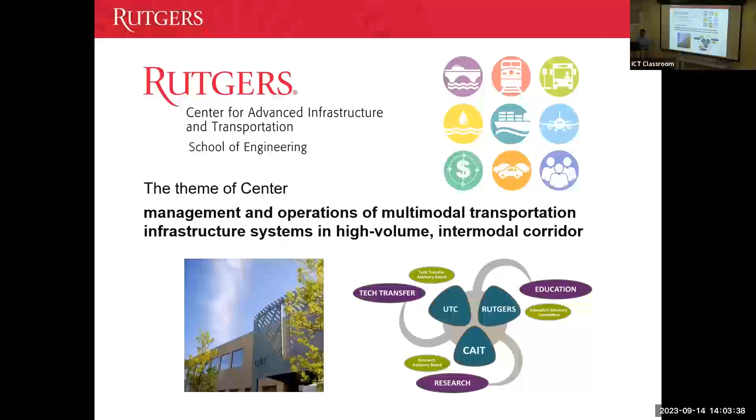At CAIT, we do all kinds of activities, and my research mainly focuses on the infrastructure side, mainly on highway, but sometimes also bridge, rail, and pipeline. So today we'll give you an overview of the projects, findings, and experiences we've had over the past 12 years, combining 4 or 5 PhD works, all heading toward the same direction: sustainable and resilient roadways. Not only pavements, we're also touching on base materials and even right-of-way assets for solar energy harvesting, for example. Hopefully we can learn from each other and find future collaboration with ICT.

Quick outline: an overview about sustainability and resilience. Probably everyone knows about that, but I want to give you a refresher. Some projects or findings we're using looking at sustainability for climate change mitigation and adaptation. Also some recent work we're starting, looking at how to improve roadway resilience to flooding. And some energy harvesting work we've been doing for the past 5 or 6 years from roadways and bridges, actually second generation on that, plus a summary and implementation.

Sustainability, we all know that, right? We're talking about three pillars. Here we want to focus a bit more on greenhouse gas emissions because these have increased rapidly with human activities for economic development. We know this is like a blanket impact from greenhouse gas emissions, causing positive radiative forcing, meaning you're emitting more heat from the ground to the atmosphere. This increases air temperature, causing a lot of adverse effects: energy consumption for buildings, extreme events, melting glaciers, and many other things.

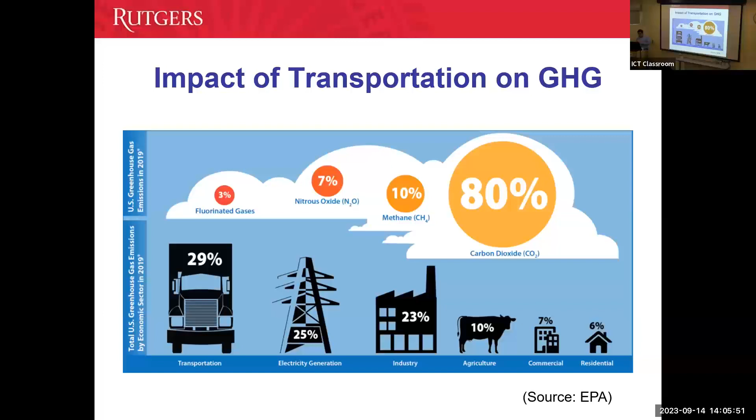You may wonder where these greenhouse gas emissions are coming from. Here's data from the EPA on greenhouse gas emissions in the US. We can see across different sectors, 29% comes from transportation, especially roadway transportation, because we're talking about fossil fuel usage compared to other sectors. Among those emissions, 80% are carbon dioxide. So in order to mitigate climate change and reduce greenhouse gas emissions, there are many things transportation can do.

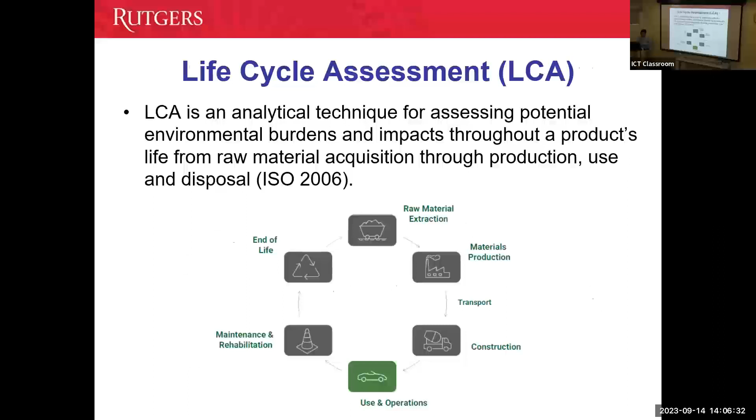You may wonder why should we do that? What's the purpose of using LCA? How can that help mitigate greenhouse gas emission? First, you want to quantify it - you know how much greenhouse gas emission comes from your project. Then you can find a way to reduce it. Using this approach, you find out not only the total emission, but also what's the emission at each phase: material, construction, maintenance, operation.

Then you can see, can I change something? Can I use concrete instead of asphalt? Can I use recycled material or not? Or can I just change the geometry alignment of the roadway? In the US, it's impossible because we only have very few new roads. But in developing countries, we have the chance to select different geometry alignment to reduce the excavation. Then you're reducing the hauling of material, reducing greenhouse gas emission. So that's a huge excavation amount.

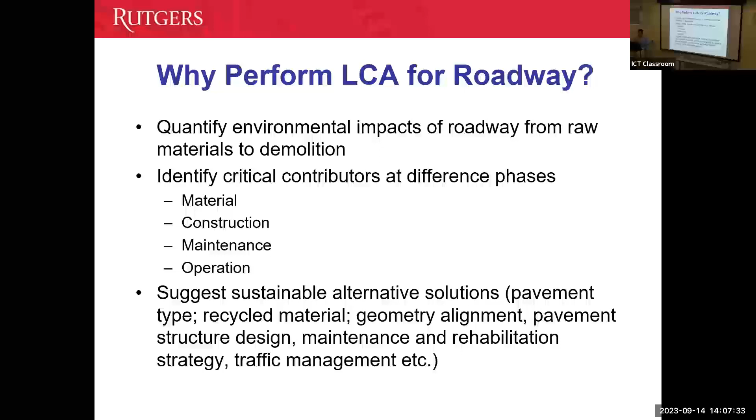And then also looking at the structure design, also maintenance strategies - we'll show you examples. We are using this approach to really try to improve the sustainability, reduce the emission.

First, from the material side, I found this chart from one of the early papers by Barcelo. I think it's very interesting because it gives you a rough overview of what are the embodied energy or carbon in megajoule per kilogram or kilogram carbon dioxide per kilogram of material. Basically, you can know roughly what kind of embodied carbon energy each material has. Here, concrete block is more like cement plus stone - cement is on top. Asphalt here is more like asphalt mixture, and you have bitumen on top. These are the materials we're more familiar with.

But also look at this - other materials like glass, plastic, or even steel, they are very environmental burden intensive, I would say. So if we're talking about reinforced concrete, or polymer modified binder, we should not neglect them, because even a small amount of them can bring a lot of greenhouse gas emission impact.

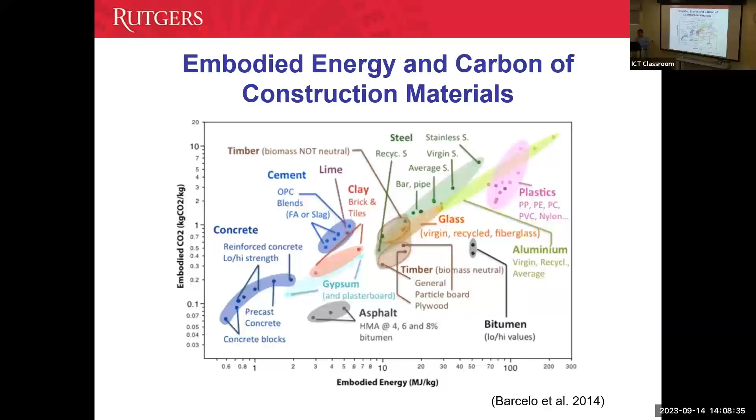In order to really mitigate that, industry has already moved ahead. You've probably heard about EPD. Now Federal Highway has a Climate Challenge program - they're trying to encourage the DOTs to use EPD in the procurement process. They hope the industry will be able to submit either industry average or product specific EPD. The EPD is basically like the output of the LCA, but it focuses more on the material stage, we call it A1 to A3. So in order to produce 1 ton of concrete or cement or fly ash, what are the embodied carbon or other environmental impacts for that?

In that case, you have this label, like a nutrition label for your food - you'll be able to really make it transparent. In the procurement process, you'll be able to set a bar, say we want the EPD lower than this amount, or give a little bit of incentive to the EPD which has lower value. That's something Europe has been implementing and the US is trying to catch up. So in this case, we try to control the material side.

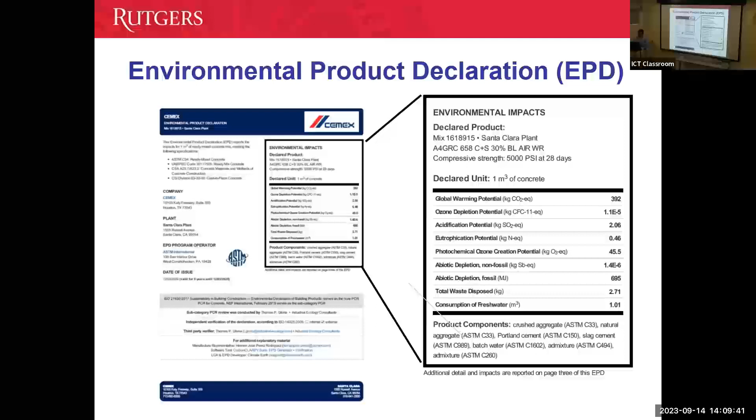Another one is the type of pavement. We are more focused on asphalt pavement, but don't forget, we also have choice for concrete. This is an interesting project we worked on with the Port Authority - they're looking at rehabilitation of the runway, and looking at what are the choices we have, and what's the life cycle cost versus life cycle assessment results if using asphalt overlay versus concrete overlay.

So the bottom one is something like at that time they're making the decision. They gave us the PMS data, gave us the previous rehabilitation strategy, and in that case we came out with a similar rehabilitation procedure - basically milling 3-inch asphalt tracks, 9-inch asphalt overlay.

If you do it this way, every 8 years you'll probably do milling overlay again. If you do concrete, you do a little bit of small milling, but putting down 18-inch concrete, and then you have very light repair. So we did an LCA for these 2 overlay strategies, and then we look at initial construction plus maintenance.

We found out that in total, the concrete overlay actually gives you less emission. This is for the overlay case.

We did a little bit more exercise for new airfield pavement. Using the FAA design software, you're able to design two pavement structures for the same traffic. We have 9-inch HMA, 12-inch HMA base plus another crushed stone subbase, versus 20-inch PCC. So for the new pavement case, that's the top result.

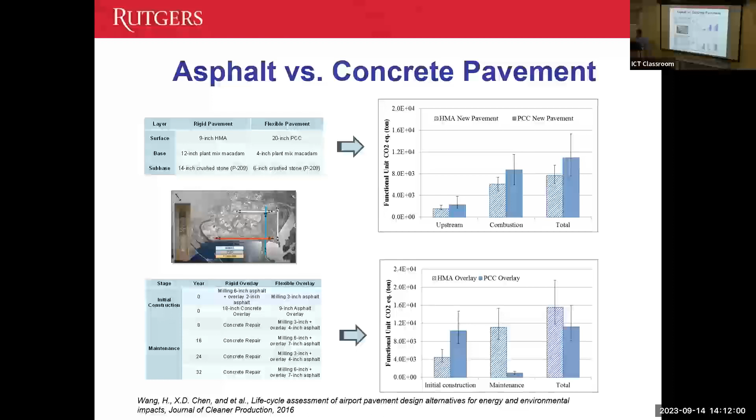But this is still the material stage. Now look at the use stage, which I know ICT has many people working on. In this case, we're looking at fuel consumption in the use stage, for example trucks, and we have aerodynamic drag force, mechanical loss, and rolling resistance.

So if you do have a 3% rolling resistance reduction, say 1% reduce, in that case we'll be able to have corresponding greenhouse gas emission reduction. So how can we really use this concept to help us reduce emissions from the pavement preservation or rehabilitation side?

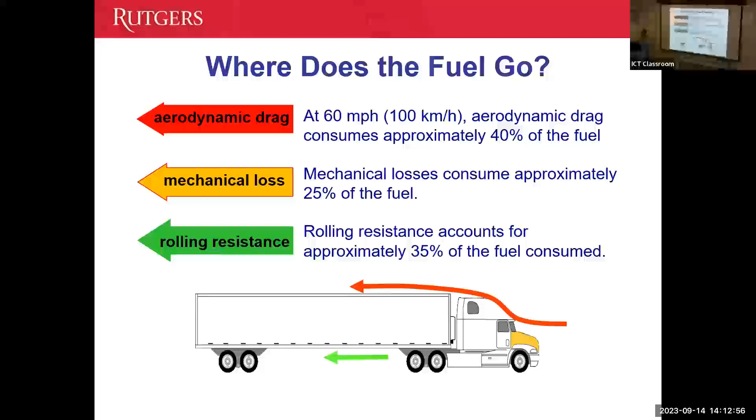So first we have to quantify. First we want to quantify what's the emission coming from the use stage.

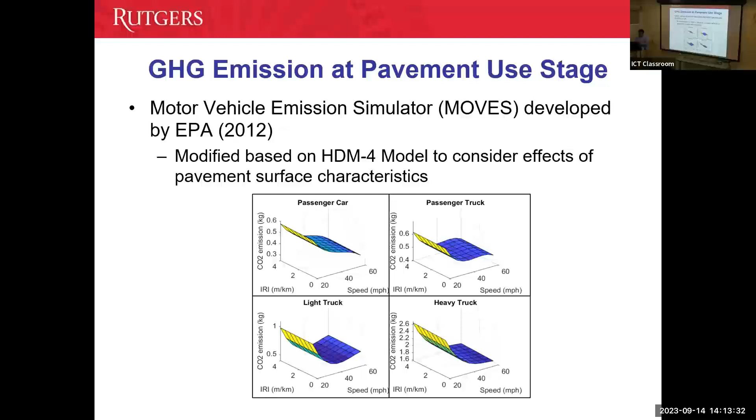After that, the first exercise we looked at was preservation. The reason we do that is because we think preservation is good with the very least amount of cost and material input, mainly for functional restoration - improving friction, reducing roughness, or reducing aging.

If you look at LTPP data, it shows IRI increasing, then after preservation it drops - a jump - and then goes back to increasing again. The data shows, depending on when you apply the preservation, you'll get different jumps and also different models after treatment.

So we use the data from 3 different treatment procedures, and we come up with a model that basically follows this trend. It's not a perfect model, but it generally captures the trend.

And then we put it this way: if I have the opportunity to select the timing for preservation, what will be the best timing? So what we did here, for different treatments at the project level, is ask - if I have the opportunity to do preservation at different application timing or year, what would be the carbon dioxide reduction compared to doing nothing?

You're expecting crack seal reduction to be very small, although the field data does show a little improvement for roughness. But with chip seal and thin overlay, you have more reduction. By playing with the amount and timing of doing the preservation, you'll get different reductions. In general, for a light treatment like chip seal or crack seal, if the initial roughness is getting higher, you probably will do it early. If your initial roughness is lower, you can do it later. This is because, as I mentioned, the jump after doing the preservation - the IRI jump - always depends on the previous IRI before the treatment.

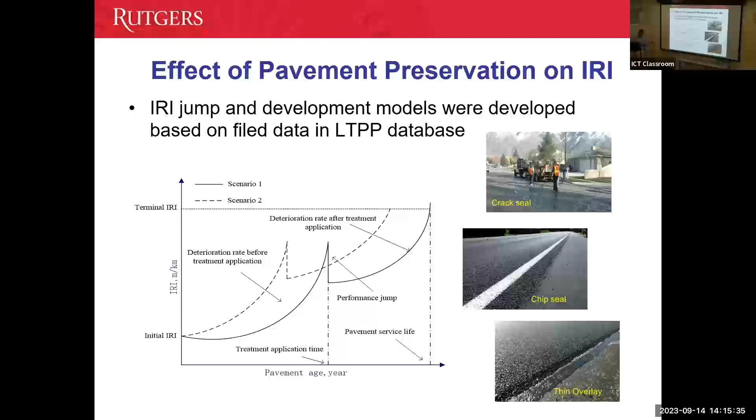People actually looked at this from a cost point of view before, but I think people didn't look at it from the CO2 point of view. So at that time, we were trying to find out, for a project level, what's the optimum timing. At the network level, we actually got a follow-up paper on that, which you can check for details.

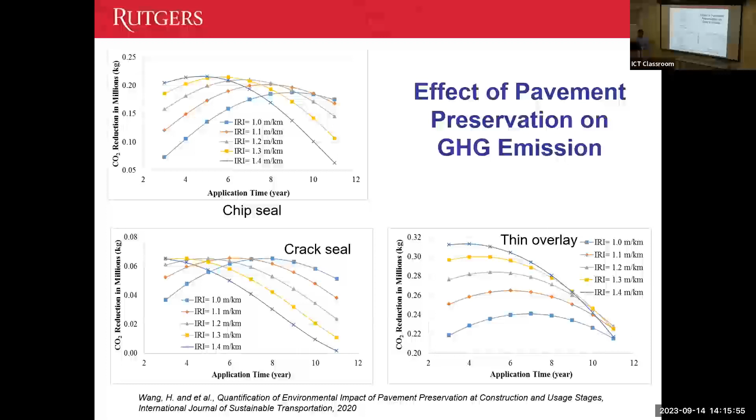So that's the preservation part. Then we talk about how climate change will deteriorate the pavement and accelerate its life. You may have different stressors, basically the potential threats caused by climate change. This could be slowly happening, like warming temperature or sea level rise, or extreme events like heavy rain or flooding. So we tried to find out, can we incorporate this into our analysis?

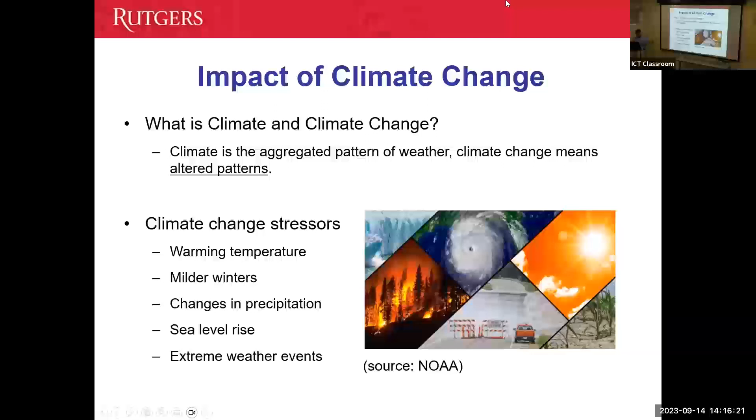One exercise we did is use ME, because at the same time we are doing the local calibration for New Jersey DOT. New Jersey has started using ME, but they are still using both design software. In a few more years, they will decide on using ME. So we developed the calibration coefficients for New Jersey, and then we tried to find out, if I'm using the temperature data coming from the climate model as compared to the current approach using historical ME temperature...

If you look at ME, regardless of which year you design, they're always using the temperature database from 1985 to, let's say, 2000 - repeating these 20 years of climate data, but not really using a future one, because at that time the future one may have uncertainty. So now we're trying to say, if we do have the predicted temperature, which comes from our collaborator from Columbia who is doing a local climate model, we're trying to compare what will be the difference, and how we can mitigate this impact.

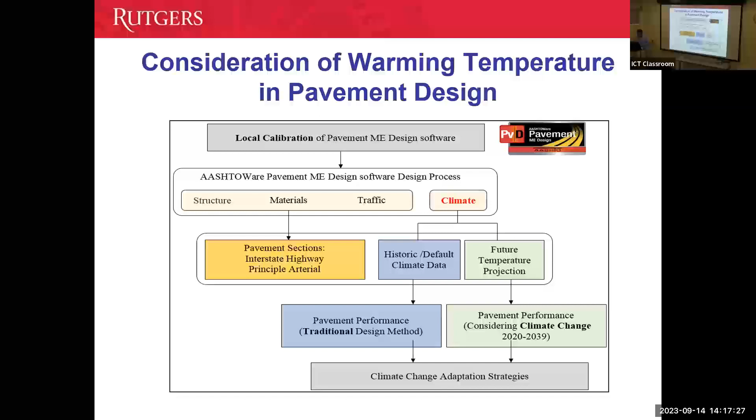So what we did here is also look at the emission. One way we differ from other people is we look at the emission. If you really look at climate people, they will tell you this greenhouse gas emission is not steady - it will decay with time, meaning this number will reduce following a function. So we adopted the Bern carbon cycle model, which gives you a decay function.

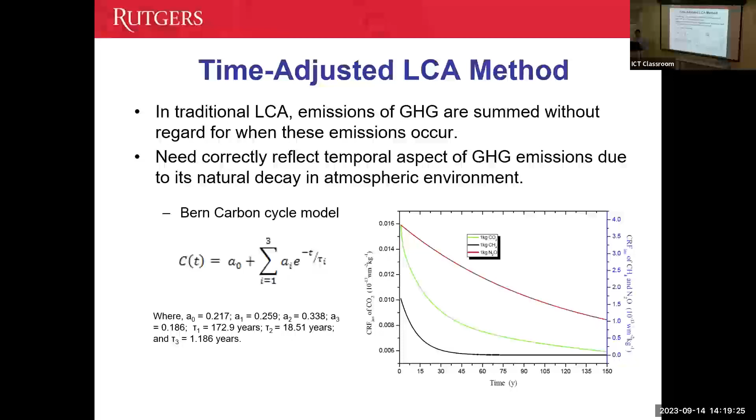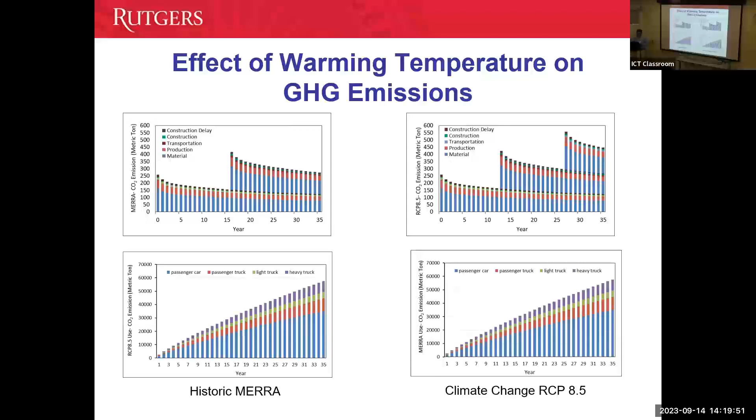So in this case, the left case is using the historical merra data, the right case is using RCP 8.5. You can see this warming temperature causes more rehabilitation, that's why you're seeing 2 jumps. But actually the total numbers are not a big difference, because the user stage also has some difference.

So in order to better show that, we did the difference - this case you have the difference between RCP 8.5 minus merra. That can be considered as the emission increase or reduction because of climate change. So this gives you a scenario: for this life cycle with this treatment, if I consider climate change, will this emission be increasing or decreasing?

And then because we do the yearly trend, you just look at the final number, that'll be the number at the end of the service period. And then you can see if we do changing different overlay thickness and also changing the threshold to apply the overlay, you will be able to see different patterns.

So interestingly, you are seeing at the overlay 6-inch, and if you do this overlay at the 10% fatigue cracking, you will be able to have actually a final negative greenhouse gas emission. Basically means at RCP 8.5, we're even having less greenhouse gas emission.

So this gives you a hint. If I do play my overlay strategy and threshold kind of in a nice way, I may have the way to reduce the impact of the emission from climate change factor. Because in this case, although I'm doing early overlay and also a little thick overlay, but I'm reducing the roughness in the user stage.

So in that case, that's why I'm still getting the final emission reduction. But again, this result is case by case dependent because the structure may change in the trend, also your overlay strategy change the trend. But at least that means we have the ways to play with it. I mean, you can find more details from the paper if you are interested.

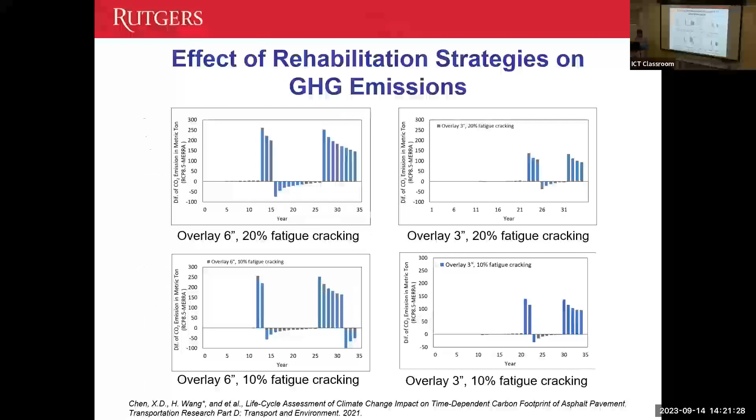And then after we look at that, we also realize, regardless we do how much to reduce the emission, it's still happening, right? We are seeing warming temperature, at least in a different way, although regionally it's different, but still we're seeing this trend. So we are seeing some extreme events happening, especially in New Jersey. We have a couple of flooding events. So we try to say, okay, how can we at the same time build infrastructure more resilient?

And then you look at the definition for federal highway administration, I mean, they are similar. Basically, first you try to do more work before it, anticipate, prepare, adapt, doing something, try to enhance your structure, or doing something within or after the disaster, right? Try to have the infrastructure respond to it or quick recovery.

And then you are expecting we have some hydraulic scouring to the asphalt. Actually, these first two pictures are taken from New Jersey. The first one was taken actually from the road on the slope nearby my house because that hydraulic pressure was able to pull the asphalt pavement out. The second one was taken from one of the coastal cities because they have the sea level rise with tide flooding.

So every year they're getting flooded for like 1 month. And then the community was trying to increase the road elevation actually every year. And then they're looking for some suggestions to solve the problem in a more effective way. The third one was from Wisconsin, actually.

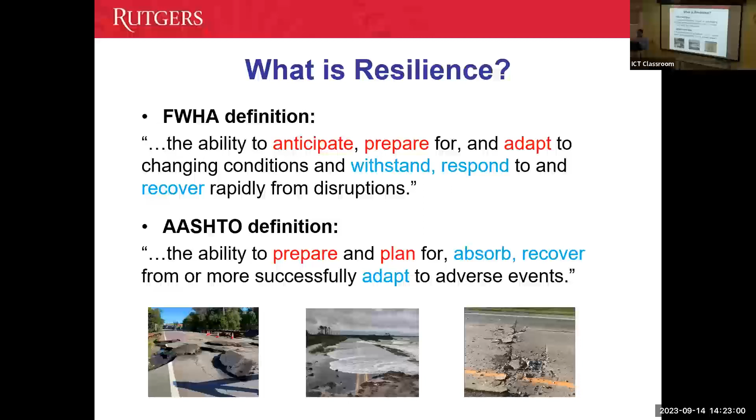Wisconsin recently have some issue for the concrete because they didn't realize the joint width they have was not enough for the concrete to expand. So they're experiencing some buckling now.

So in that case, there's some guidance from federal highway basically tells you if you want to design the resilient roadway, first you try to understand what's the hazards, what's the possible threats from, and what's the risk of having them. If the risk is too low, maybe you don't need to spend too much effort because the effort of preventing it maybe is too high.

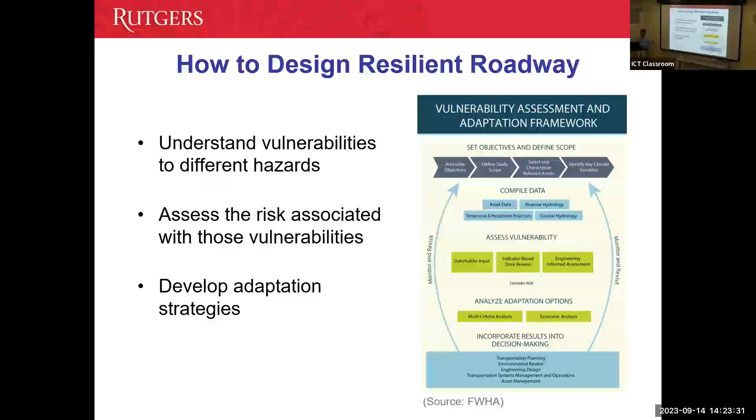So really depending which hazards have higher risk or which hazards have high consequence, you are deciding which one I will go for adaptation. So that's a general procedure they have.

And then if you're really looking at the assessment approach from resilience, basically the basic definition, we modify the figure a little bit. So you are talking about performance level of the infrastructure getting down. That's because of disaster, and then you're getting recovered.

And then depending which hazards or which recovery method you're using, you may have better performance, or you may have a same performance, or you may not even getting recovery because, for example, like sea level rise or warming temperature, just getting constant temperature increase slowly, or the groundwater table increase slowly. In that case, you still have the threat, just happen slowly.

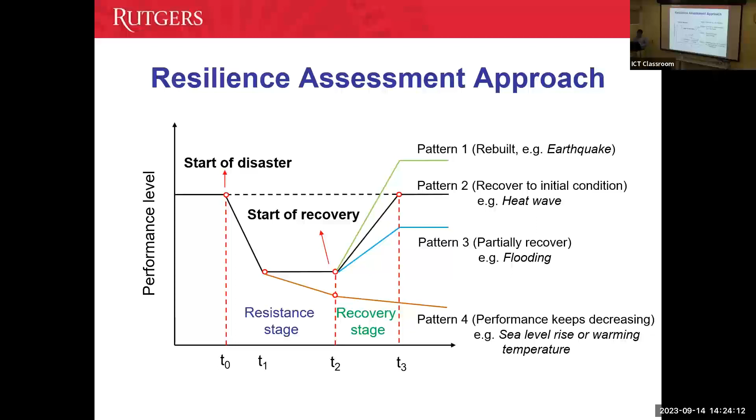So based on that, we recently developed an approach trying to look at for flooding case, how can we better quantify the impact and also develop some adaptation strategies. It's still ongoing work for one PhD and it's still halfway on that.

So first we try to identify the intensity and frequency of this event, and then we modify the model we have before. Before we are already using viscoelastic asphalt, nonlinear unbound material, moving load, but now we're adding the moisture variation. Actually, you know the unbounded material modulus is a function of moisture. And then if you look at the moisture distribution in the unbounded material subgrade, it's much more complicated than you are thinking.

We found some LTPP data we'll show you later. Basically, it's really up and down, or changing.

But in this case, we would be able to consider, with a combined model, the modulus of nonlinear and also moisture dependent, also matric suction pressure dependent, together. In that case, if you do have moisture content changing, because of the groundwater depth increase or the flooding, you'll be able to capture that moisture changing. And then you'll be able to see, okay, even post-flooding, I still have some moisture content residual or increasing after the flooding, you'll be able to have impact on that.

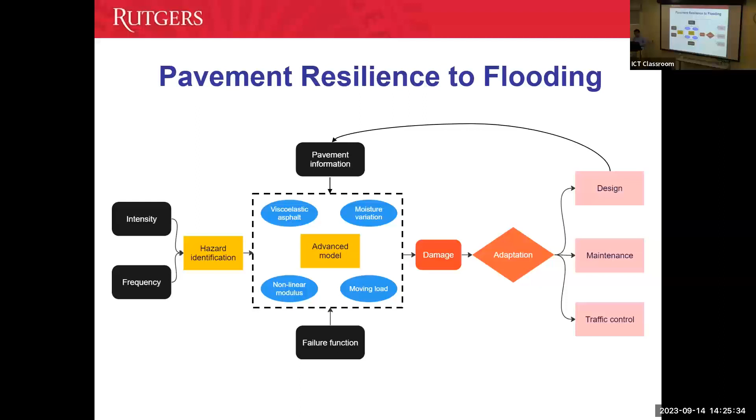So the first thing we did is we tried to define a scenario. In this case, it's a paper we submitted this year for TRB, to be accepted.

So you're looking at, okay, we have the groundwater rise. This is continuously happening. We also have extreme precipitation happening, that's every 2 years, you have one high precipitation event. We also have flooding happening, that's in year 5 and year 20. And then each event you may come with the intensity of the event and also the moisture content changing.

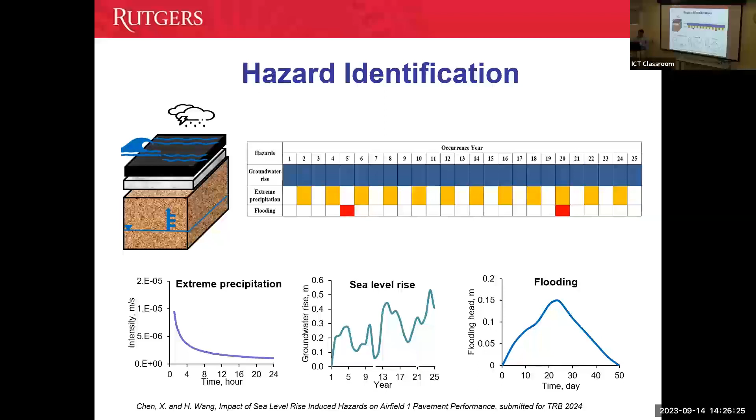So this data is coming from selected field data from literature or from the New Jersey side. So in that case, you know the moisture content of the unbound material, how it's changing with time. Here we're assuming the asphalt is really protected or sealed with no cracks, so there's no water coming through the asphalt pavement. In this case, we focus on the unbound material impact.

And then we kind of extended the model we had before, adding a hydraulic part. So we'll be able to simulate if I do have a water head coming from the flooding or coming from the precipitation. And then depending on the geometry of the road, how wide the shoulder is, and also if you do have vegetation or not, you can decide different infiltration coefficients, and then the water will be able to diffuse into the soil within the layer.

Again, this is happening from the shoulder, the unprotected, unpaved part. We are assuming water only can come from the shoulder, or you have a crack in the pavement where this water can come through. But for the paved part, the water is not able to come through. So with that, we'll be able to predict the moisture distribution. Basically, water will be coming from the edge to the center gradually. And then this will change the nonlinear modulus.

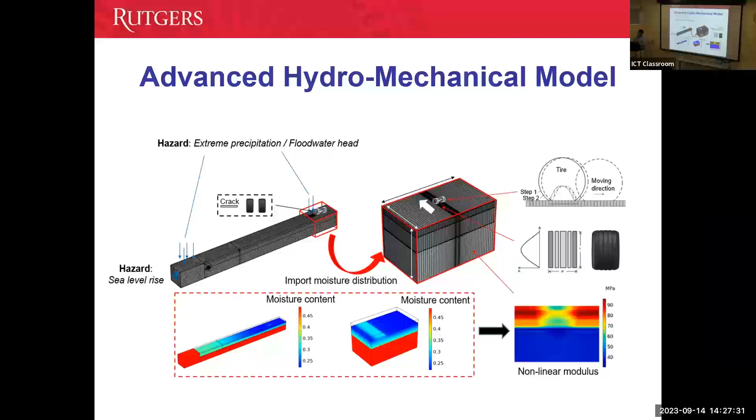And then we kind of looked at, okay, with this moisture condition, how will that change the pavement condition. In this case, assuming, for example, after the flooding event, the data has shown that after flooding, the moisture will stay there, slowing recovery. It takes about years, not going back to the original value shortly.

This is because from field data, we are seeing the moisture may take about 1 to 2 years to go back to normal. So we kind of assume the 2 boundary extreme cases, so you can see how this damage would be changing if you do have these different events. The damage factor was calculated with the traditional damage function, so we didn't do too much work on that, but the response has been updated based on the moisture changing.

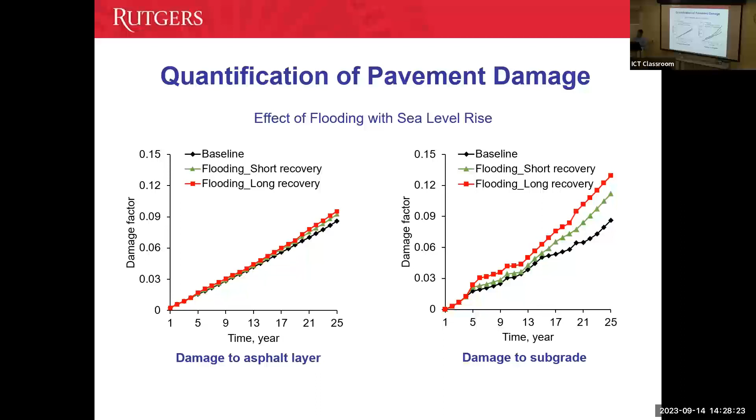A little bit further down, the work is we're working with DOT looking at, okay, after we have the flooding, can we open the road right away? They are worried about something like the subbase still being wet. So in this case, if you open the roadway, it allows heavy traffic to come in, and also heavy traffic volume will accelerate the deterioration.

But it's very challenging to measure the moisture condition after flooding, you can do that, but it's very costly. So ideally, they want to do FWD and then they have the deflection. So you can see the deflection will be increasing during the flooding, right after flooding, and then start decreasing as the water kind of recedes away. But this trend takes some time. So we want to know, okay, what will be the threshold of deflection we can use in this way.

And then we propose a different approach, instead of looking at deflection, we're trying to see, okay, can we transfer this deflection to response? So if I can find the relationship between the deflection and response, then I'll be able to predict response from deflection.

With the response, since I already have the damage function available, I'll be able to predict what the damage will be if I allow heavy traffic for this month, or if I apply some traffic control for that month, for damage reduction.

So in order to get that deflection to response, ideally you'd have real data before and after flooding, but that's very difficult to get.

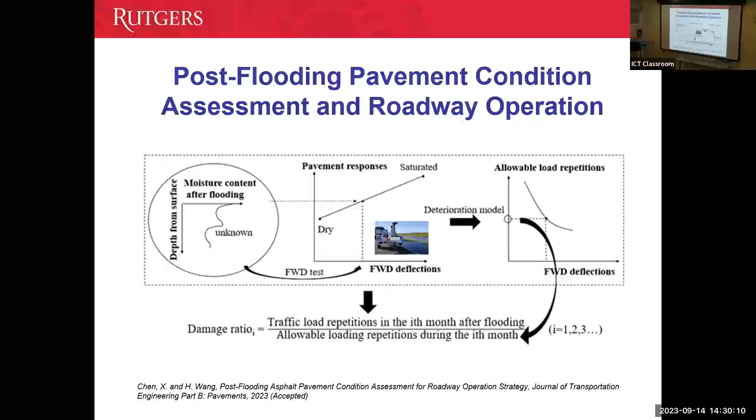So indirectly what we did is go ahead and collect real data from LTPP and other states with low moisture conditions, but there's no FWD, no response data, but we know the moisture condition and distribution. And then we build a database.

For example, this shows you some real data at different sections, spring, summer, fall. So basically we have about 200 sections with moisture contents.

And then we try to see, okay, if I can build a database for this, and then do the FWD simulation and also the moving load simulation, I'll be able to get the deflection versus response relationship. And then with the assumption that after flooding, this moisture variation is part of that.

So instead of back-calculating the moisture content or modulus with the post-flooding data, we're building ahead a database, and building this universal relationship. Again, you'd need more data to be more accurate, but the idea is that with these various sections, we're building a relationship between deflection and response.

And after that, if I do have this deflection data available from the testing side, I'll be able to see what's the response if you're allowing this kind of truck in. And then if you have the traffic loading, you'll be able to get what kind of damage over the months.

And then you will see, okay, if the moisture content is getting higher, your deflection will be higher, and depending on that, you'll be able to quantify the damage.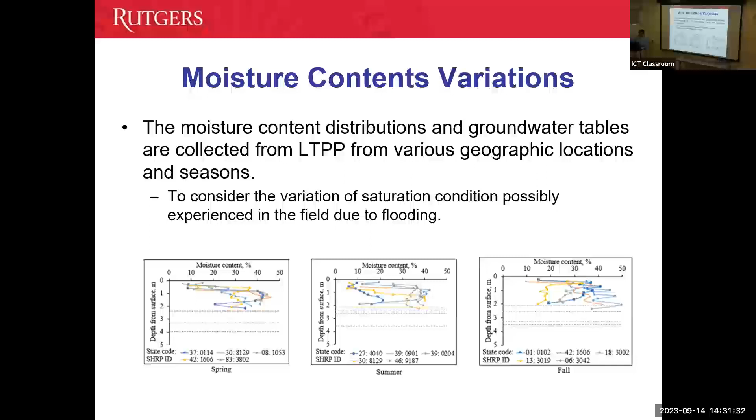So we developed a model, basically two post models. Actually this model has been working since my PhD, so we just borrowed it by adding this moisture variation.

You can see pretty good correlation for deflection and tensile strain, but compressive strain is tricky because in this case the unbound material is getting more complicated due to moisture content variation, so the correlation is not that good.

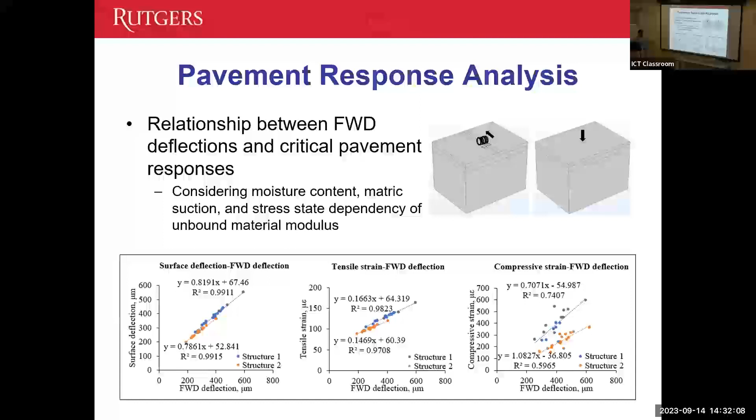In this case, you can see sample data: before flooding you have lower deflection, after flooding it gets higher, and then at 1 month, 2 months, 3 months, you actually get reduced deflection, but it still doesn't go back to the previous level.

So we can convert this to tensile strain, and then we look at it, okay, if I do allow the same traffic as before flooding, what will the damage factor be?

Actually in this case, if we have about 30,000 ESALs per month, the damage caused by the pre-flooding case will be 0.001. But if you look at the damage here, because of the moisture event, this damage factor becomes 0.02 or 0.04.

So in order to control this, let's say you want to make sure the damage accumulated during the first month after flooding doesn't exceed the months before flooding.

So something you can do is either reduce the traffic volume or control the heavy weight. So you'll be able to know what's the minimum allowable ESAL for this month.

Again, that's the choice of the DOT side. But the idea here is you can do something to reduce the ESAL or improve the traffic level on the road right after flooding, depending on your moisture content recovery or coming from your FWD results.

So that's something we thought could be a good approach, trying to really prevent accelerated damage caused by the flooding issue and its moisture variation.

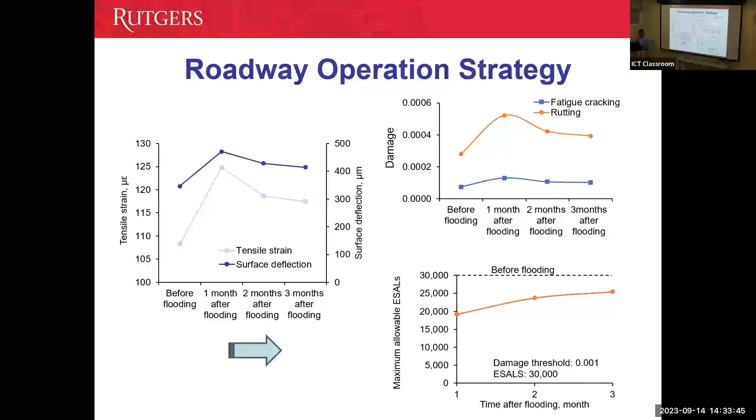Okay, then go to the last topic. We also recently completed a project in phase 1, and phase 2 is ongoing, trying to look at getting energy from the roadway.

I mean, the idea is not new because many people work on that, but we try to find a way to get energy by making it useful and also have less disturbance with the traffic or existing infrastructure. Of course, you have solar energy in the roadway, you have kinetic energy, and you also have a lot of assets around the roadway.

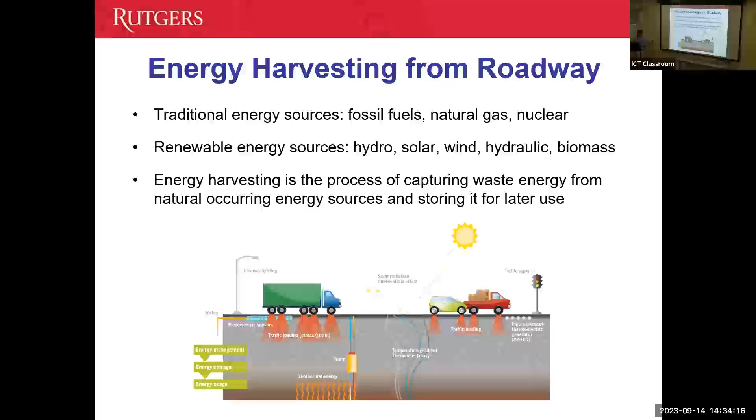So through the project, we kind of focus on two ways. One is looking at large scale.

In this case, we're looking at solar energy, which is also not new at all. But we're trying to see how we can use roadway assets, especially in New Jersey. We're using noise walls because in an urban environment we have a lot of them, which we thought was a good opportunity to get into solar energy. The energy can be fed back to the grid, even creating net metering savings in revenue for the states.

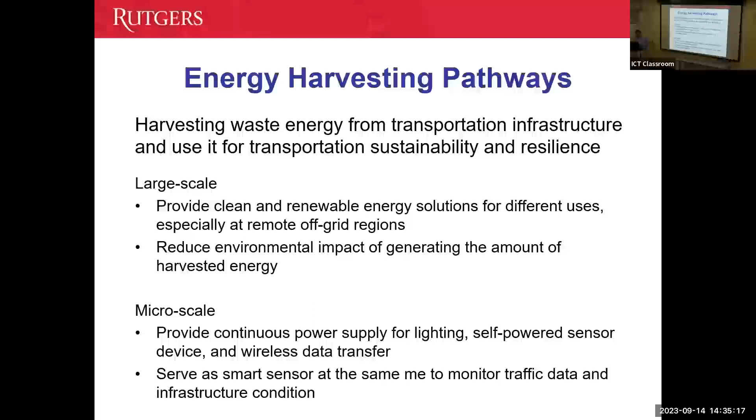The micro scale is the small scale, milliwatt energy, probably only enough to power sensors or wireless data transfer. You're not able to generate a huge amount even if you put a lot in, it's still limited. So in this case, we're feeding this energy to the sensor, providing a small amount of external battery. But if you're using some piezo material, you can also use that sensor too. So those are the two focus areas we covered in the complete project.

For the solar side, it's not a new idea, but it depends which way you want to put it on: rest area canopies, or even pavement, which has been tested in China. Maybe sidewalks are okay, but travel lanes are challenging. People are even proposing to build solar tunnels, where you don't have rain and snow issues. But the issue is the price - you have to build that to cover it.

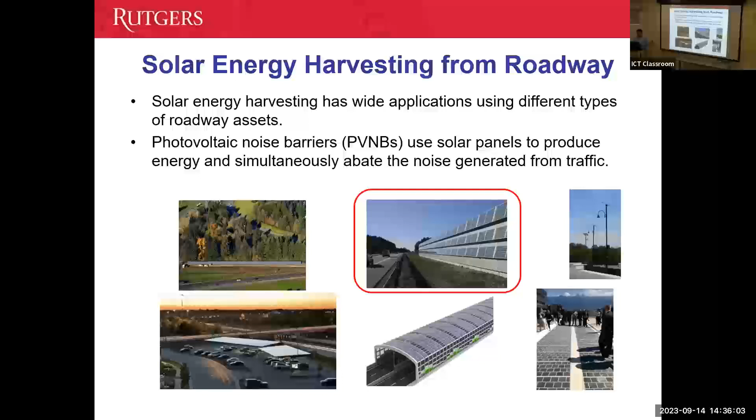So in this project we focus on noise walls because New Jersey has quite a long mileage of noise walls, and also these noise walls are going to be retrofitted. We're looking at the best way to combine the solar panel with the noise wall for the retrofitting design.

The goal was to find out what's the best design, because different panels can be put in. We try to find out not only the energy output, but also the life cycle point of view, because you also need to spend energy and money to produce the solar panel. What's the return period for the produced energy to equal or even be higher than the energy spent to produce the panel? So we're talking about the payback time - we want the benefits produced to be equal or even greater than the expense spent in the beginning.

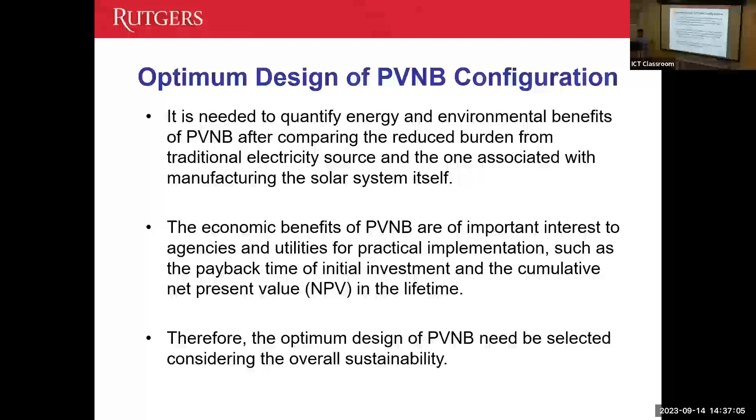So we look at a few criteria: the cost side, what's the cost reduction? What's the reduction from the solar energy generated, which will be cheaper price solar to DOT, but also you are paying upfront price to make the panel and install it on the noise wall. We're also looking at the green cost reduction for this process, and the payback time to make this break even.

Although the project was focused on New Jersey, we did a little bit wider study for the US. We chose 4 different states and cities. They have different global horizontal irradiance, basically an indication of the solar intensity, and then you're able to come up with a design.

That's the 4 designs we did analysis on. You can put panels on top, which is easy, but the area is limited, though you can do tilting. For the vertical one, you can also do a bifacial solar panel, where both surfaces can carry or absorb solar energy. Then you can do the shingle one, which is the solar shingle - if you do good spacing, you avoid shading and have a large area. The fourth one we call vertical build-out, basically putting the panel directly on the noise wall, which is easy for installation and has large area, but you cannot adjust the direction.

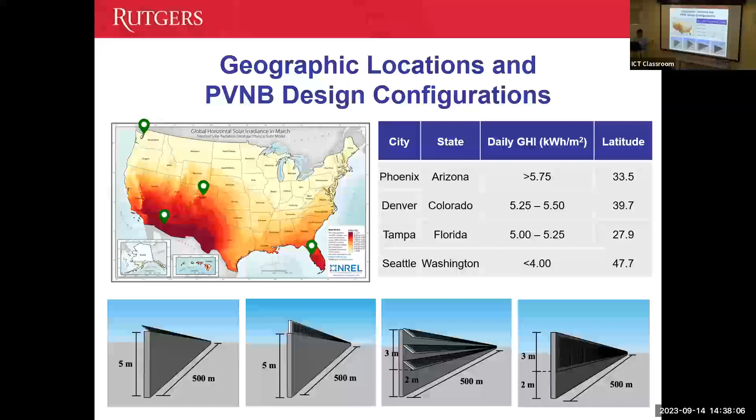With these 4 designs, there's software you can use where you just input the design, and it has an embedded solar model from the National Renewable Energy Lab, which gives you the solar radiation data. Then depending on the design you have, you're able to get the energy output. That's the first step - we're looking at different designs at different locations to see what's the energy output.

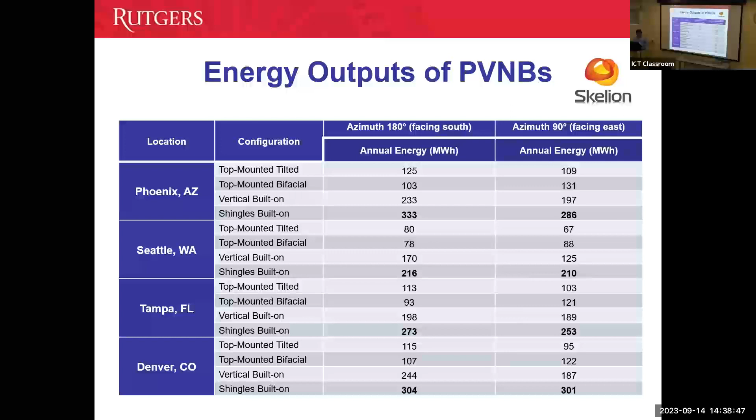Here is the comparison between facing south and facing east - two extreme sides. One is an ideal case facing south, the other is an ideal case facing east. We don't have any face of the noise panel facing the actual sun direction. After that, as I said, we look at the multi-criteria analysis: with the most energy output, what will be the total energy benefits?

So basically that's the difference between the savings from the solar panel energy minus the price of the panel and installation. So after a few years, you start seeing the savings, but at the beginning you're putting the money in. So in order to reach this break-even point, that's the payback time.

That's why you're seeing the energy benefits. Also, you have an energy payback time. Similarly, for economic payback time and cumulative NPV, and also for greenhouse gas saving and greenhouse gas payback time. So we did a little normalization, since some metrics highest is better, some lowest is better.

So in general, if you put this into a spider chart, the highest area gives you the highest benefit for this design. This is the case for facing south. So basically, the top-mounted design may give you the shortest payback time, but the total energy saving or greenhouse gas emission saving may not be as good as a shingle design.

So it depends which criteria you're looking at. If you're talking about long-term return, you probably go for the shingle design. But if you're looking at just the short-term, to get a break-even point, maybe the top-mounted design is okay. We can find more details in the paper we published this year.

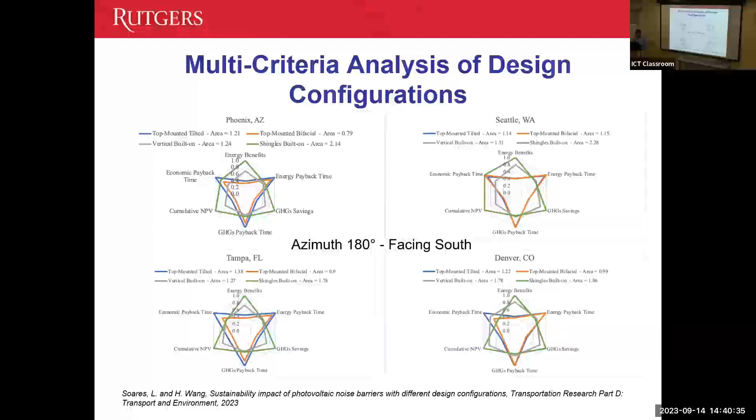The second part of this project is looking at the micro scale. Here we're looking at a small scale, and we work with piezo material since we're more familiar with it. It's a material that changes its electric property under a stress-strain field. So depending which way you're looking at it, it can be sensing or energy harvesting. We're talking about PZT more for energy harvesting, PVDF mainly for sensing.

In this case, you can do a compression mode or a vibration mode. Either way, you are changing the stress strain, causing a voltage, which you can convert to current when you have a circuit.

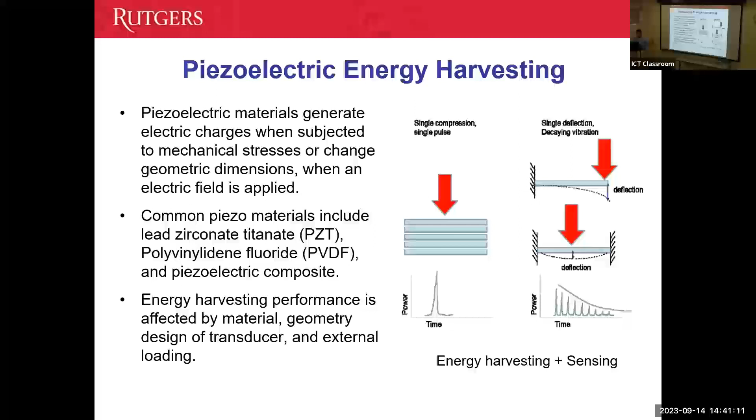So we first looked at previous designs, including our own older work. People have worked on these designs, trying to put them on the pavement. The simplest is the disk. You can also make a beam. We did some piezo cymbals converting compression into tension, and there's also some recent work from Korea using PVDF composite, which bends to generate energy.

So different designs have pros and cons. Energy output can vary, but the thing is they have to be embedded. In discussions with DOT, they don't want digging. To be honest, they just said they don't want to put something in, especially for testing - they don't want to do that.

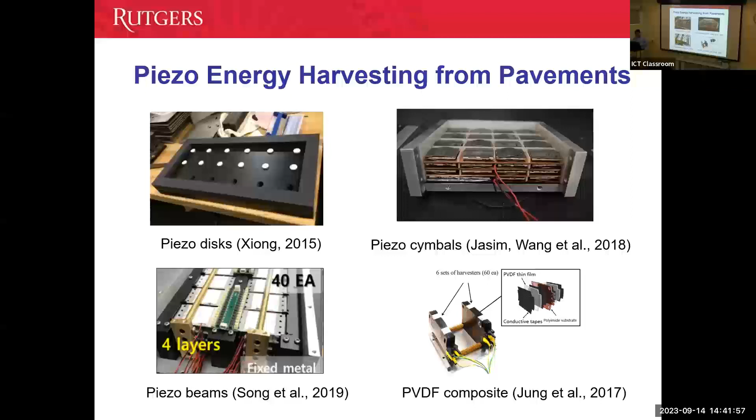And it happened that we also have another project working on the bridge side, the bridge accelerated testing project, so that gave us a little motivation. This recent project we just completed, instead of looking at the embedded one, we looked at the vibration one.

The idea isn't new since people use cantilevers to generate piezo energy, but here we want to emphasize that if you look at the natural frequency of the bridge, it's not just one frequency - there are really multiple. The major frequency may be 4 Hertz, another at 10 Hertz, another at 20 Hertz, and then a few high frequency cases. So it's really multiple frequencies.

For piezo energy harvesting from vibration, you have to match the hosting structure's frequency with your resonant frequency, or your cantilever's own frequency. Once you have this matching, you're able to get resonance - the highest vibration. Previously, people were matching just one frequency, but here we're trying to match a couple - not all of them, but more than one.

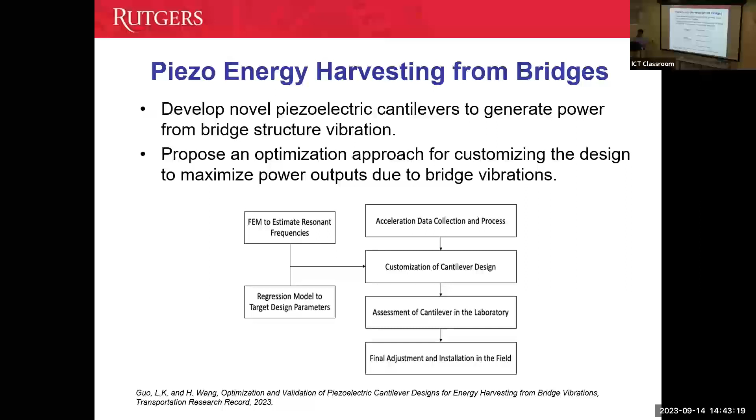So in this case, we came up with a design we call multi-degree of freedom. We put multiple masses on the beam, turning one beam into 2 or 3 beams, each serving as a separate cantilever. In that case, you have several resonant frequencies. We then collect acceleration data from the field and use it to optimize the resonant frequency and come up with an optimized design. So basically, that's the lab testing we first did.

So you can see the cantilever here. The left one is 1 degree of freedom. The middle one we call 2 degree of freedom, so we're cutting a little bit in the middle to create the internal beam. And the third one is 3 degree of freedom, where we're adding more cutting. Of course, you could do more, but you have to consider structural stability, so depending on the piezo cantilever you have, you may not do that many.

The idea is with 1 degree, you only have 1 resonant frequency. With 2 degree, you have 2. With 3, you have 3. So if I can match these 3 separate resonant frequencies to the bridge's host structural natural frequency, you get the highest energy output compared to using just 1.

So we first did lab testing, which basically verifies or measures the resonant frequency. Then we conduct what we call a multi-physics model. In this case, it's not just mechanics—it also involves electrostatics and magnetic field. So we'll be able to predict, if I have different masses and different cantilever beams, what the resonant frequency will be.

The reason we're doing that is we want to create a database, so I'll be able to easily find what kind of mass combination I'm using.

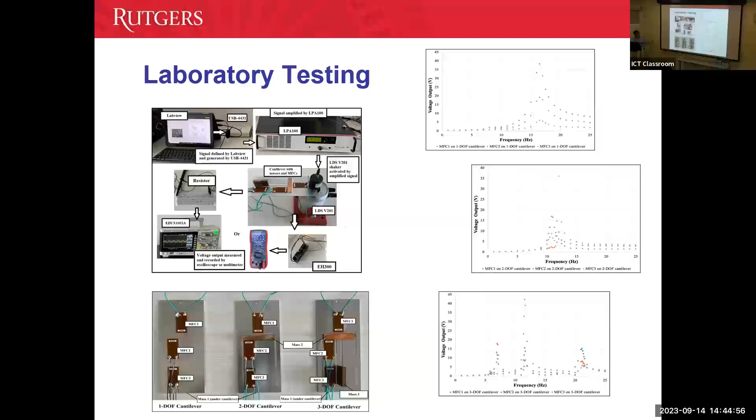The mass is basically as shown here—here is the mass we're talking about. So you're putting the mass here, which is called the vibration mass. The amount of this mass is very important for changing your frequency. Of course, the size matters too, but we are fixing this cantilever size.

So we create a model trying to see, if I have different masses, what the natural frequency will be, so I can create as many cases as needed to develop this relationship. Later on, we'll have the frequency measured from the real bridge, so I can see what kind of mass combination will match this resonant frequency. That will be my preferred design—that's the purpose of the model.

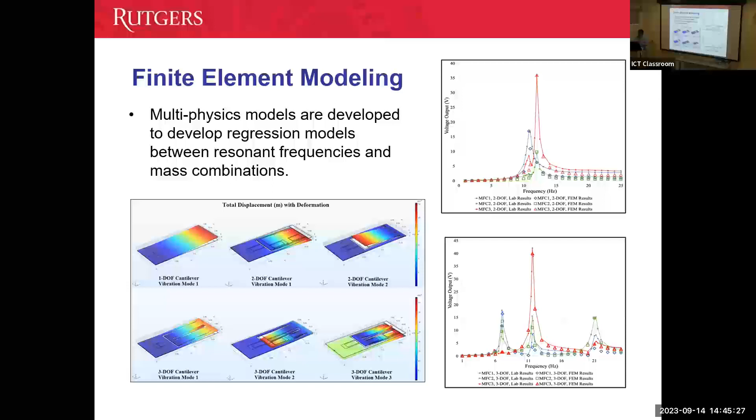Otherwise, you'd have to test all the mass combinations, and every time you'd have to build a new sensor.

So with that, we also put it on the bridge. It's not a real bridge in service—it's a full-scale bridge on a separate project, mainly looking at bridge deterioration and NDE. It's a separate federally funded project for another party, but we were able to test this cantilever on the bridge.

So we're putting it in the middle of the girder, and in this case we're using the 2 degree and 3 degree designs. First we get the acceleration signal as the bridge vibrates under a moving load—a real tandem axle load. This is the acceleration, and this is the peak we're talking about in the frequency domain.

Then we're trying to adjust the mass on the sensor to match this peak. So you can see the data here: the blue one is purely using a random mass, and the yellow one is after matching the mass.

Why is there this variation? Because sometimes it's tricky—you may need exactly 35.5 grams of mass, but in the real case you won't be able to get that exact amount, so that's why you have a variation.

But basically, you can see the higher end towards the preferred design, so we're able to increase the energy output quite significantly. Of course, after changing the location on the girder, where the sensor is placed, and the design, the size of the cantilever will also change. But the idea is we'll be able to adjust the mass, which is the easiest way to tune the cantilever to match the host structure.

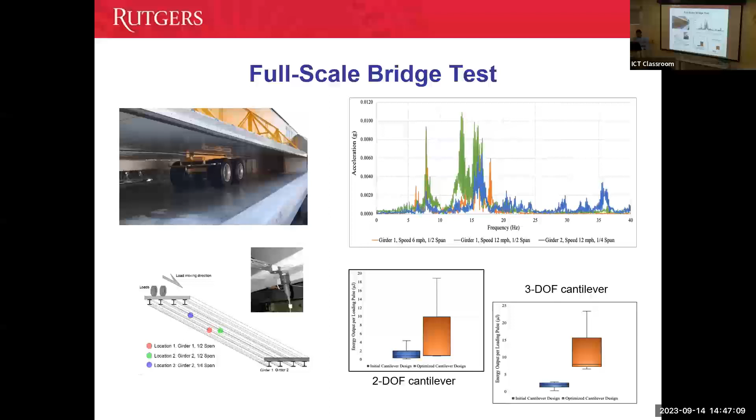The work in phase 2 is really trying to link this to a bridge sensor, so this can provide power to that sensor in this case.

In summary, we really used a lifecycle assessment approach and tried to integrate it into decision making for design, preservation, and rehabilitation strategy. In this case, you can see whether it's possible to improve your application timing or your strategy threshold in order to reduce greenhouse gas emissions over the whole lifecycle.

We also started looking at how to consider hazards, or the impact of hazards, on pavement performance in order to develop adaptation strategies. Currently we focus on post-flooding road operation strategies. From the energy harvesting point of view, we believe that's an option, but it doesn't mean you should do it for every road or every segment, because we want to make sure it doesn't affect current traffic conditions.

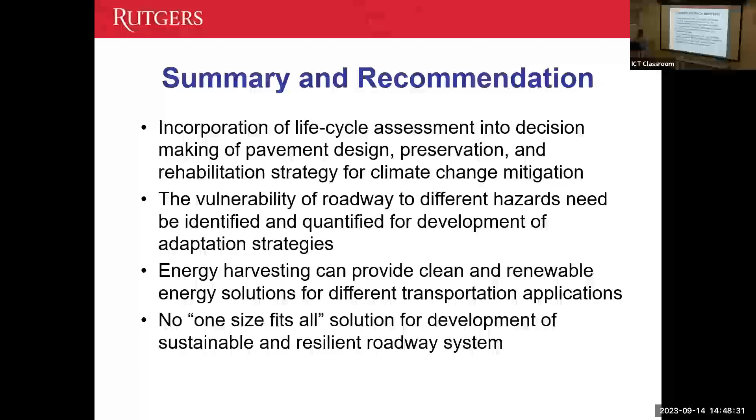This is an additional function, not really the essential function for the road. This may bring some small benefits, or no negative effect, but some positive benefits. Finally, I think there's no one-size-fits-all solution for this sustainable and resilient roadway system. We want to use our knowledge to solve the problem one by one and try to reach them. Thank you for the attention.